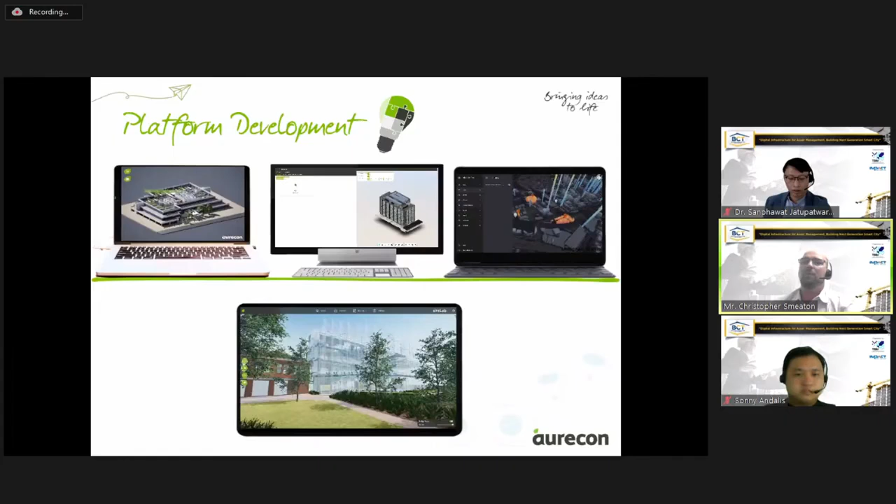So when we look at the experience that Aurecon have in this, we've been doing digital platforms for quite a while. We purchased a company called Unsigned Studio about four years ago, which is a visualization and technology company.

And they have developed online platforms, one of which is called SiteLab. This enables us to bring all of our digital technologies together in one place.

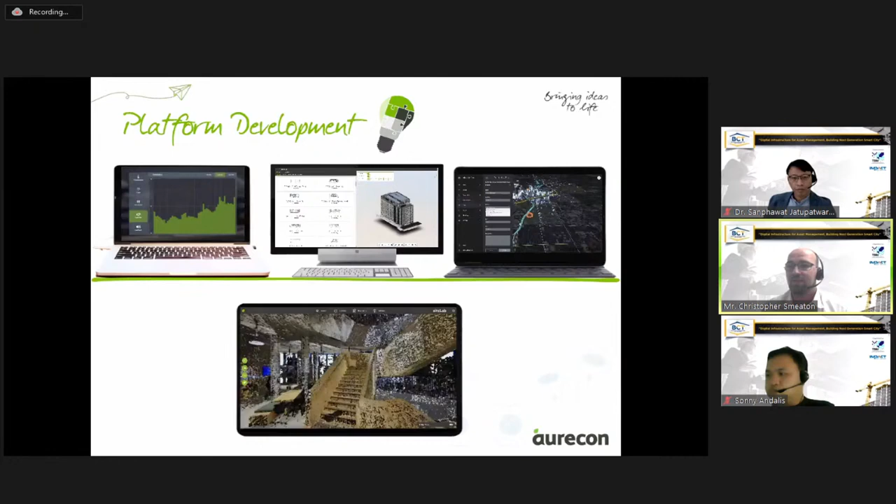We can leverage all of our information from our design information to asset information on site. And I'll explain a little bit about that as we go through this presentation.

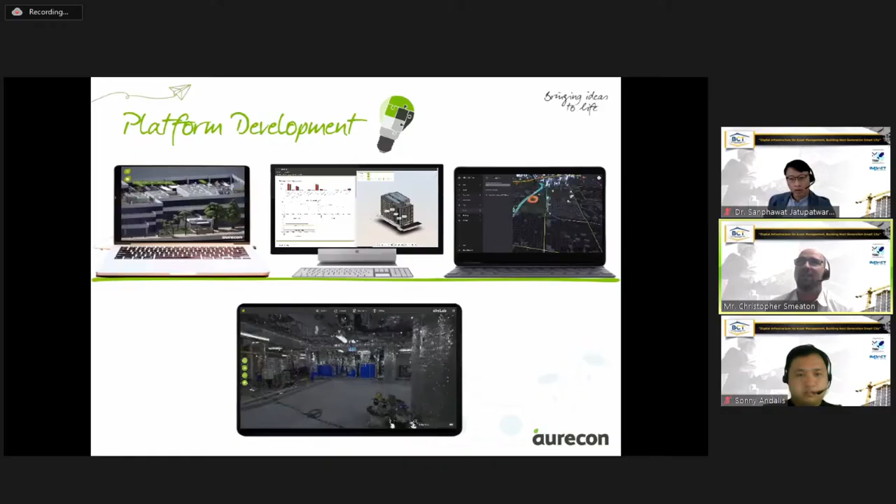So on the far left-hand side, this is one of our own buildings in Australia, one of the first digital twins we tried to do with this platform, where we linked it to different data sets we could get. The next one along, we went into a little bit more detail.

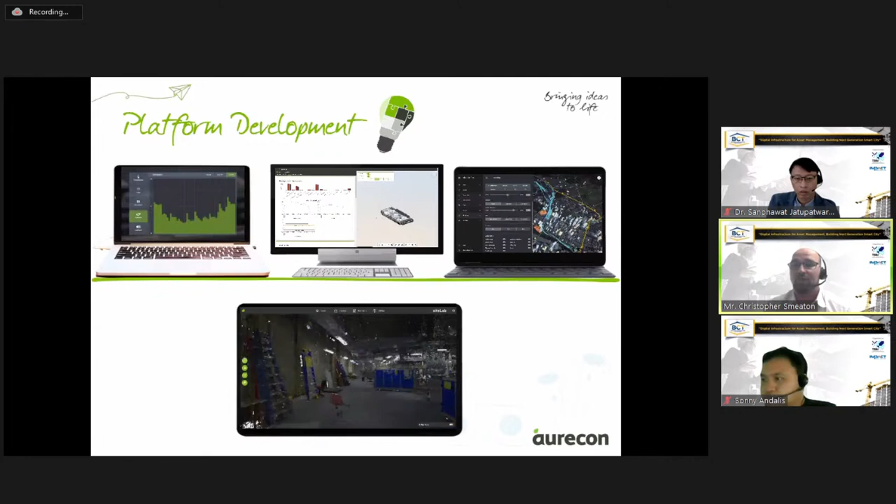This is what we call the Treehouse project, our own building in Brisbane. And we started to link in not only our asset information, but also the energy usage.

We were doing site inspection reports and bringing all that into the one system. So we were able to start running a lot of analytics on that and optimizing our building based on that data.

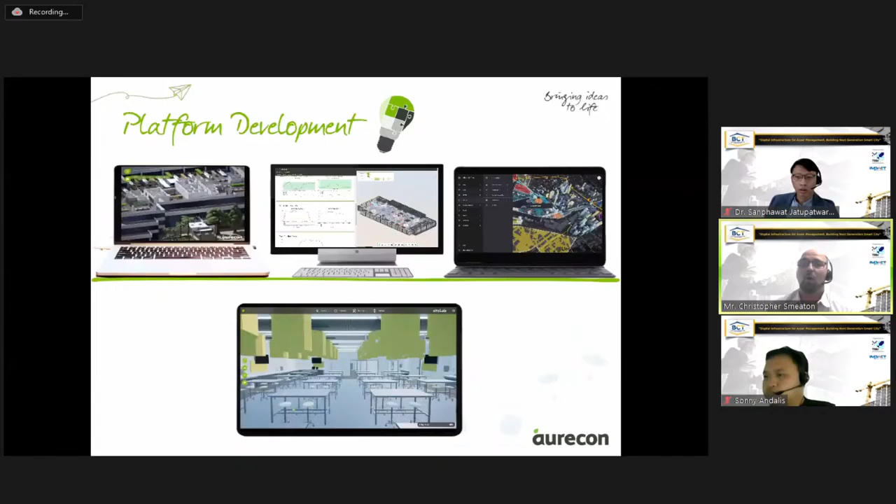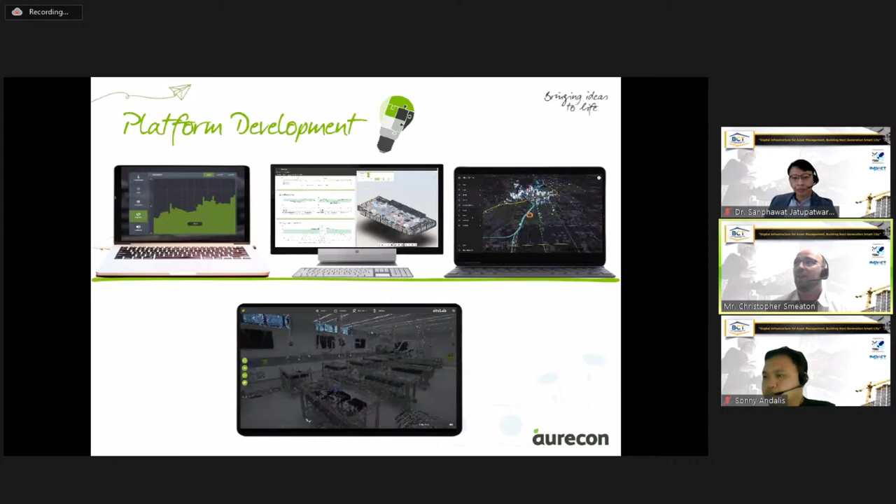And then we have, on the far side, our SiteLab City, which is our city-wide application. I'll talk about that a little bit in the coming slides.

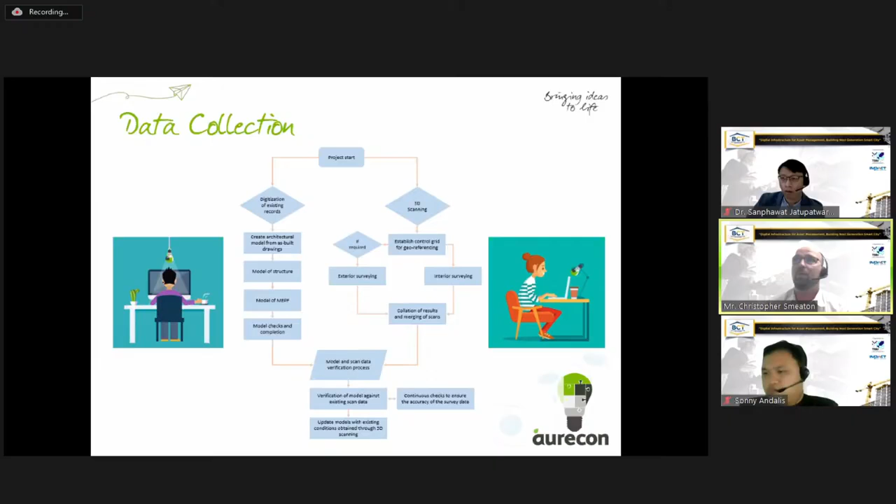So the model became very important to them because they would use the model later to give to other consultants for them to enhance, and then it would be pushed back into this system. Otherwise, if you weren't looking at doing that, you could possibly just use the scan data. But there are pros and cons, depending on what you're trying to achieve for your client at the end of the process. One thing to keep in mind when capturing data for this type of process is the size of the data, and this really helps.

To help with this, it really enforces the fact that you need to start looking at your digital risk assessments and also doing your digital work planning before you move into the project. You scope this under the first stages when we do our workshop with our client, because it's a challenge not just for us as the consultant, but also for your client.

So on this particular project, the raw data alone was 5 terabytes. Once we processed that data, it was over 20 terabytes. And that was just the scan information, let alone all the other information we had to build through the 3D modeling.

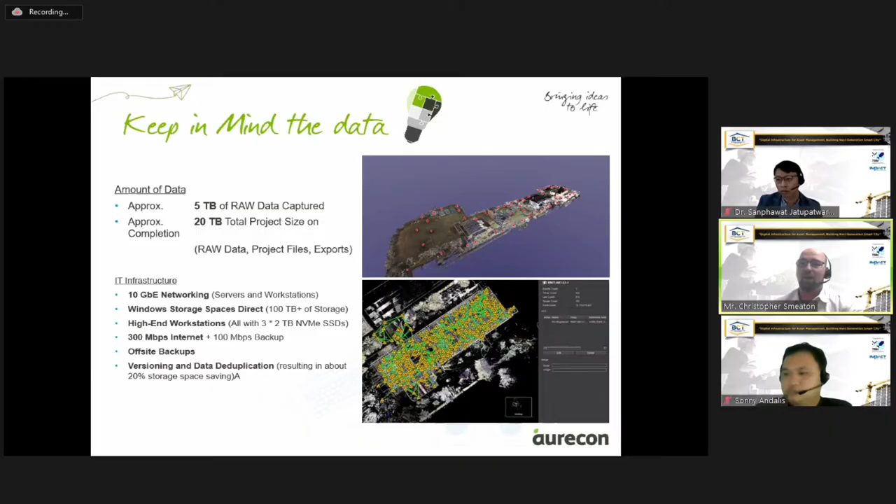Then you've really got to think about how you manage that data in your own IT systems. How are you going to link it into your models? Have you segregated it in the right way? Can you optimize it for modeling? And how are you going to deliver that to your client? Your client might not have the infrastructure to absorb that amount of data. So it's key to think about this before you start the process, and have that open conversation with your client.

Once we started on the project, we established georeferencing around the site, because this was the beginning of a journey, and there may be new buildings or refurb work, so further scanning might happen on site. Plus, we had no way of geolocating the site for the client given the information we had, because that wasn't captured.

So we went to site and created all the referencing and ground points for the client. Later on, if they ever want to do scanning again on that site, they have the reference points they can use, and it can be pulled straight in without having to reference it all again. And this was the equipment that we used.

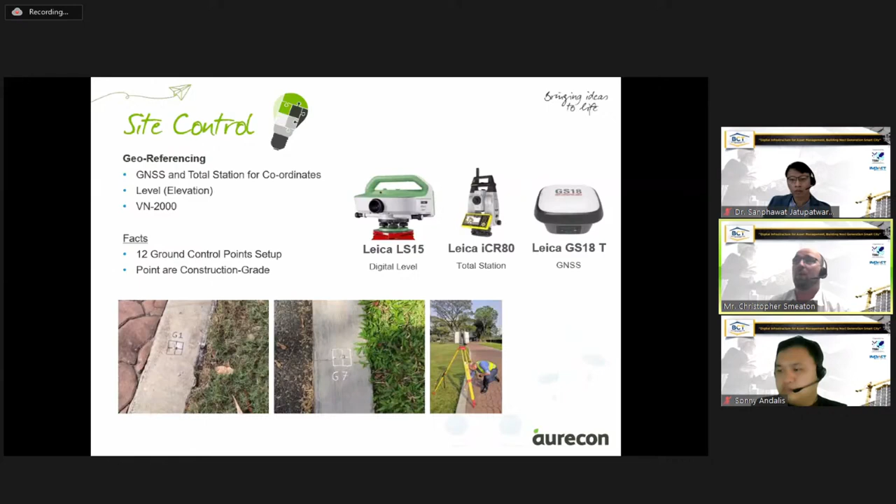So the different technology we used on this project was around the site. We used the Pegasus backpack. All the equipment we used was Leica systems, and a company called GeoInstinct here in Vietnam partnered with us to do the scanning. The Pegasus backpack was used for external scanning.

Extremely good - you just put it on your back and walk around the site, and it does all the capture for you. The quality is really good as well. The only downside is the equipment is about $300,000 worth of backpack, so you have to make sure you don't fall over. But it was a really good capture.

For the internals of the buildings, we used the RTC 360. The quality and accuracy of that scanner was probably far beyond what we actually needed, but it gave our client a lot of information and gave us some really solid information to do the verification with. The other great thing about this scanner is it captured 360-degree photos everywhere we did a scan, which really enhanced our ability to QA/QC these models as we moved forward for verification.

So when we talk about verification on this project, we used various different tools. Obviously, we compared the 2D CAD drawings to the BIM model to do the gap analysis. We tagged all the assets - so GeoInstinct, when they were going around on site with the scanners, whenever they came across an asset tag, they took a picture of it and it geolocated it within the 3D scanner, which then brought it into the point cloud. This really helped with the QA/QC system.

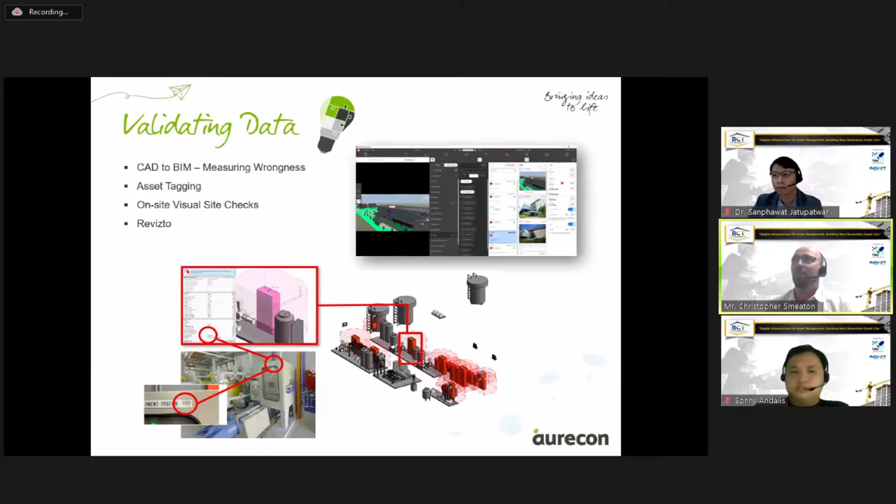We also used Revizto, because it was a really good platform for us to bring our client into and give them that experience of working with our team. We found it really, really successful. We were concerned at the beginning how it would work, but our client was in there taking photos on site and uploading them, giving us real-time feedback when we were doing the modeling. That really helped while we were waiting for the point cloud data to come in, because we could already start the verification from the information our client gave. That really built the trust between us and the client.

Then we had to think about how we were going to use this point cloud data to model. There's a couple of ways we could approach this, and we have approached this in the past. We could create a mesh, and that's probably going to be the easiest way of us dealing with this. We've done this before.

We can upload it to BIM 360 so you can share it with the rest of the team, and we can add these teardrops of information through it, and attach photos and things to that. The system we used color matching when it came to the triangulation, so if there were two triangulated points near each other with the same color, it would delete them, which really reduced the file size.

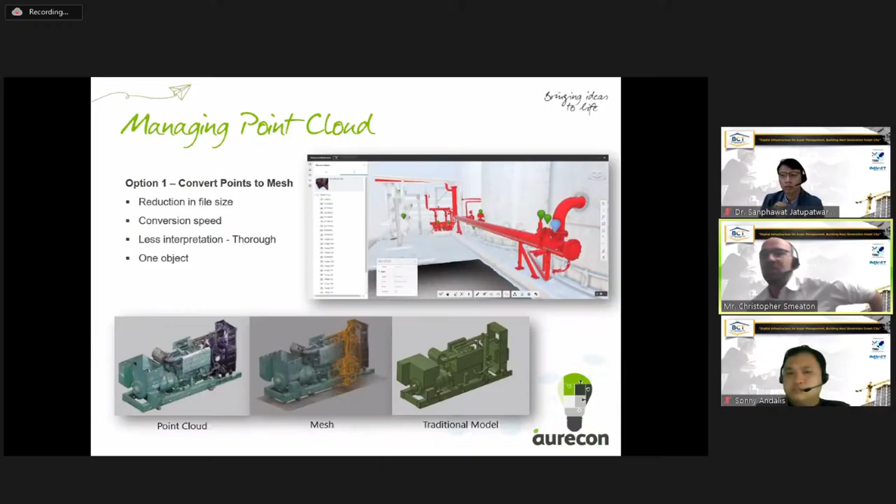The only problem with this is it's just one big object. It's not object-based modeling, which caused us a bit of an issue if we're wanting to use it for automation.

So what we decided to do in the end was to use JetStream Viewer for the client, and you can see that in the bottom of the screen. We also used CloudWorx, which allowed us to link an LGS file directly into Revit. The LGS files are really light. This video was recorded on a tablet that barely runs Revit, but it was able to link in this 1 terabyte file into Revit, and it worked really well.

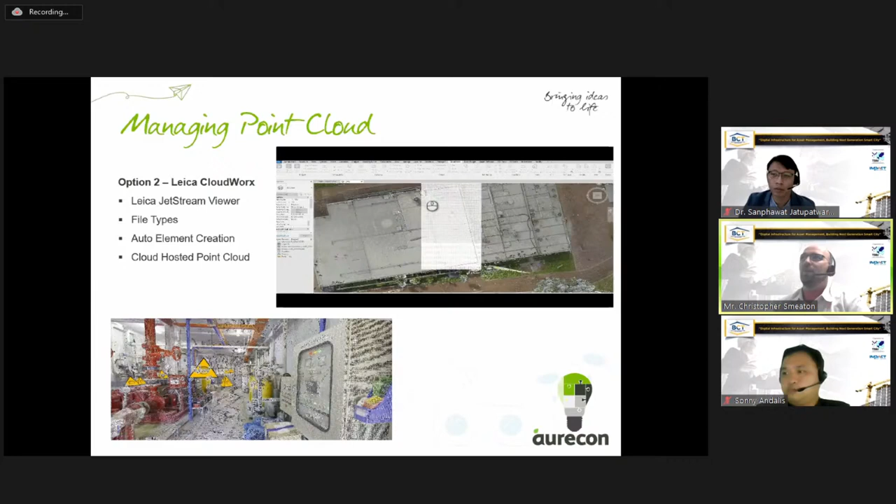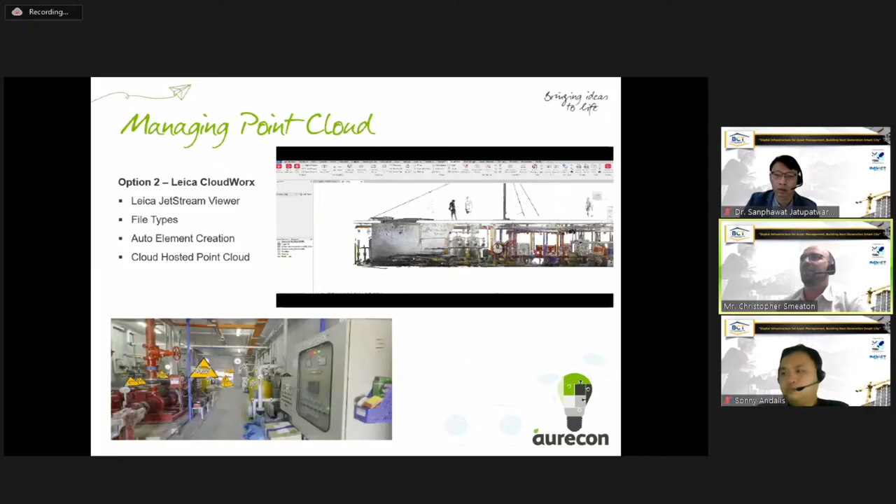What this enables us to use is the inbuilt tools for automation. CloudWorx has piping and wall automation, so we're able to click on piping and it will identify it.

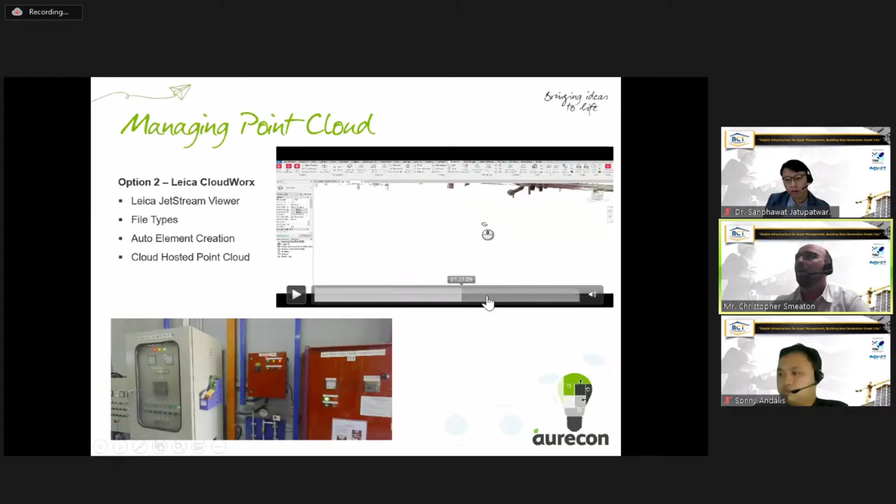I'll just, if I can get my— just fast forward it a little bit for you guys.

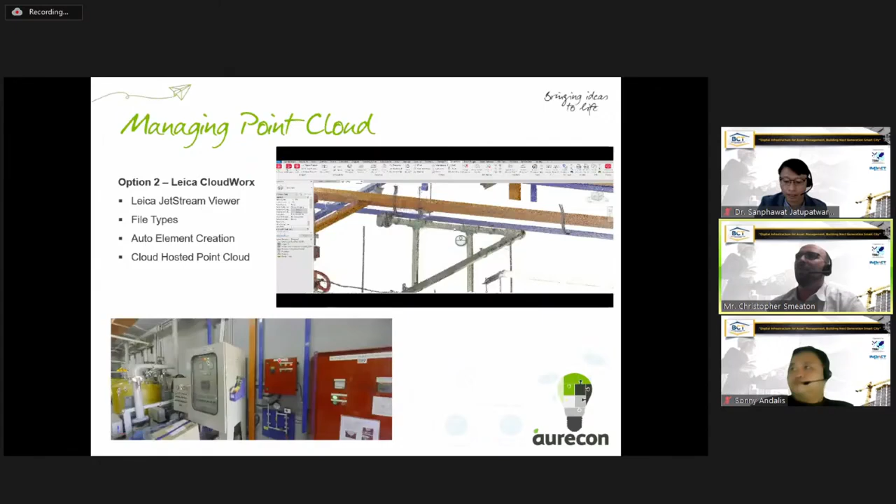So you can choose the different piping and select on that, and CloudWorx will identify the piping from the point cloud just from where you click, and give you a few options. You can just okay it, and then go through and click the pipes. It'll also do the automatic joints as well.

Once you've done that, just wait for it to catch up. You can then use the joint command and pick the two pipes, and it will join the pipes for you and add the connection in there.

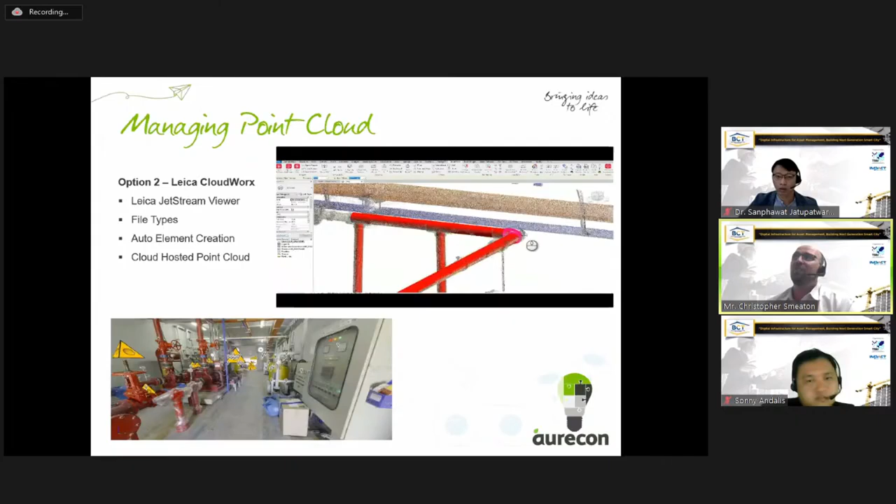This really speeds up the process, and this is why we decided to go for the object-based modeling approach, because it helped us create this from verified information, which was really good.

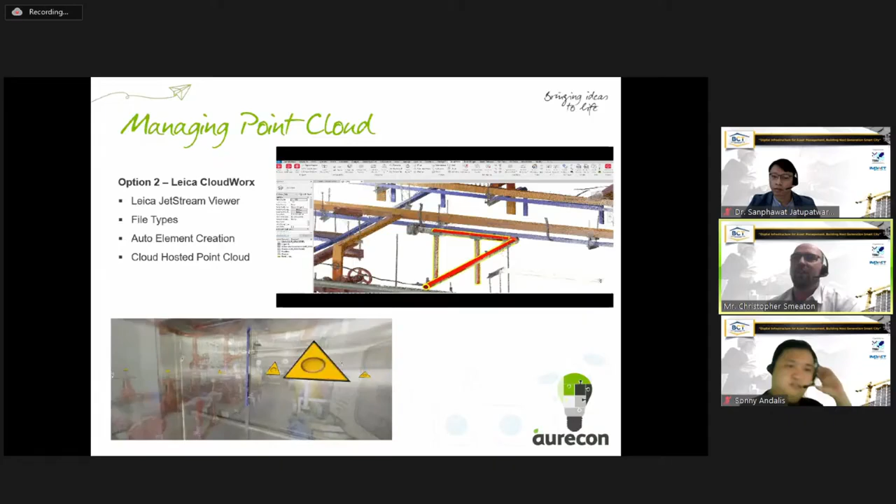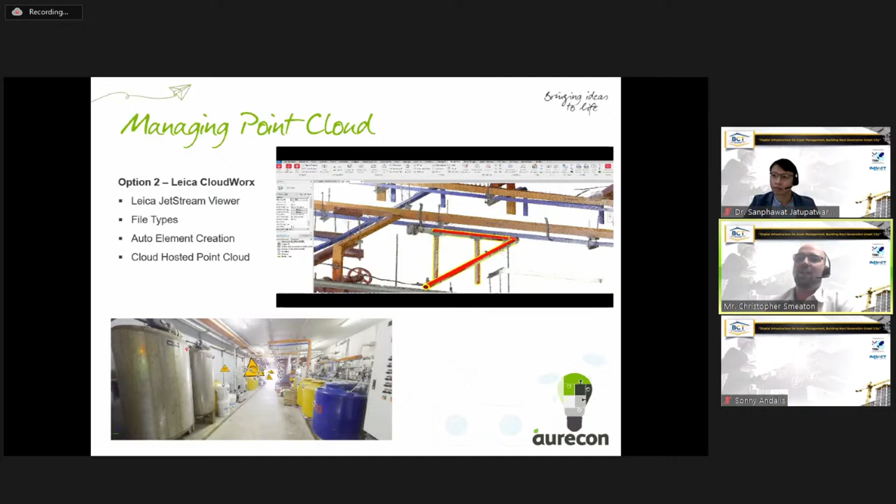The other aspect of doing the 3D scans that helped the client was we were able to give Jetstream Viewer to them, and halfway through this project is when COVID hit. So our clients were able to use this information when they were at home and carry on with their investigations around their assets and looking at the condition while they were off-site, which really helped them.

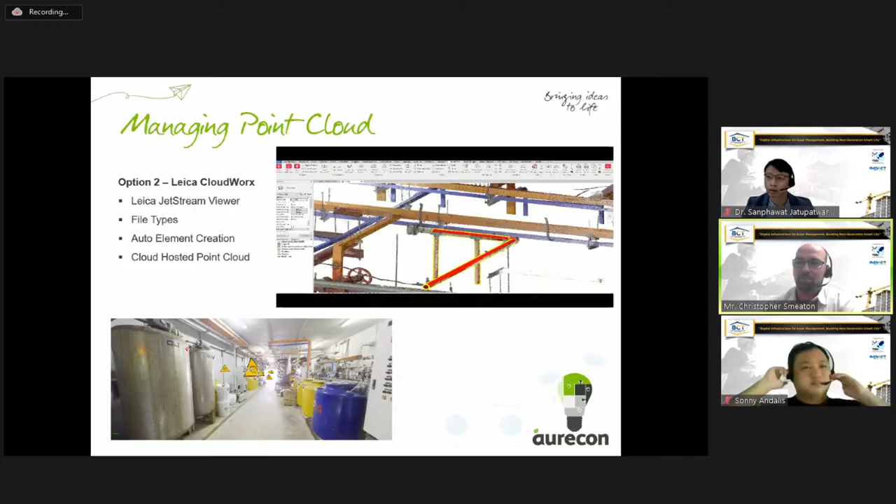The next stage was verification. We use a program called Verity that compares the point cloud and the 3D model together, and gives you a report of where it doesn't fall in line with tolerance. It'll also tell you what's in the model that isn't in the point cloud, and objects that are in the point cloud that aren't in the model.

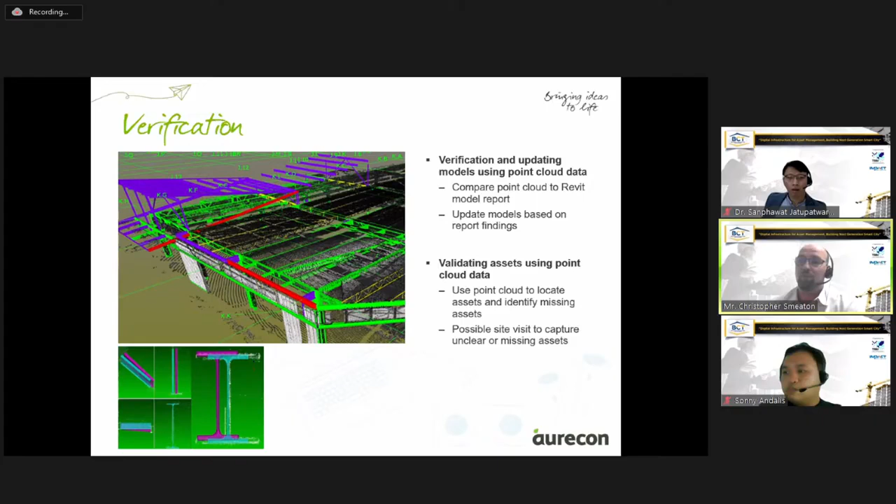We've used this for verification of as-built and also verification during the construction phase, so we can see if the program is following the construction sequence properly, or if there are things missing, which really can help the client.

The next thing was connecting the data. We talked about our SiteLab application, and our client is using Archibus. What we didn't want to create was two systems. We've got BIM 360 that hosts all the models, and we've got Archibus that holds all of the asset information.

We have our SiteLab application that is the interface for our clients to go out on site and use. So what we did is create the API link between Archibus and SiteLab, which helps us push information back and forward between the two systems. It also links the information in from BIM 360, so we created this whole system that is basically your one source of truth for your digital model.

The client is now able to go out on site with their iPad, pick on an asset, fill in an asset form to tell us the condition of that asset, and when it's submitted and approved, it pushes it directly to Archibus. If they're having to do any updates on Archibus, that is also pushed back through to the system. So we're starting to build this really connected system for how they can accurately monitor their assets.

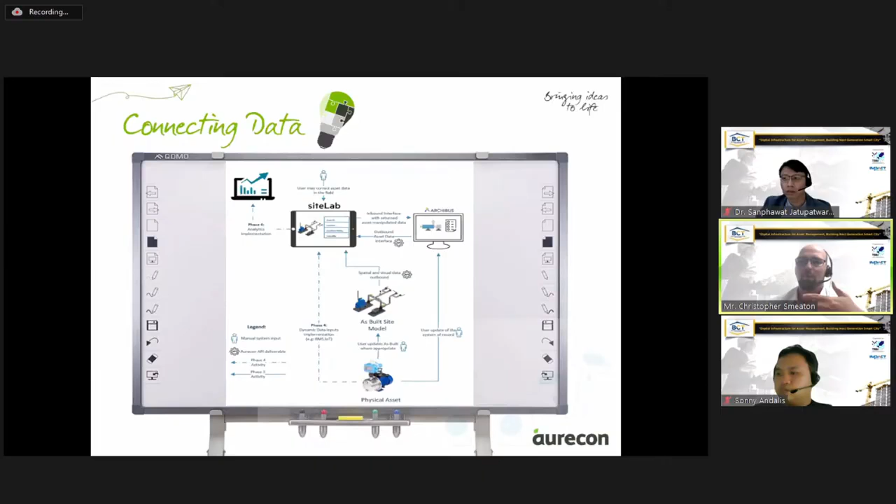So, oh, sorry, just go back.

So this was during the test phase. This isn't the finished article—this was when we were doing our testing for the client. But this gives you the idea of what the information looks like when we bring it into SiteLab.

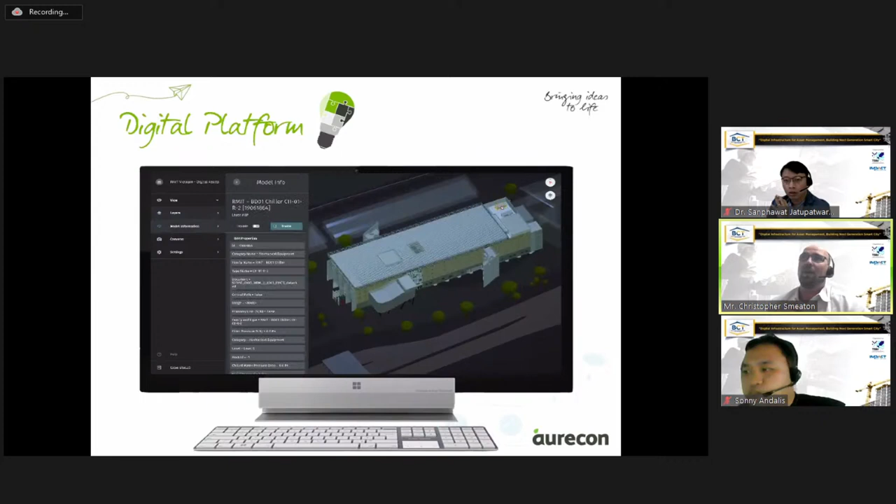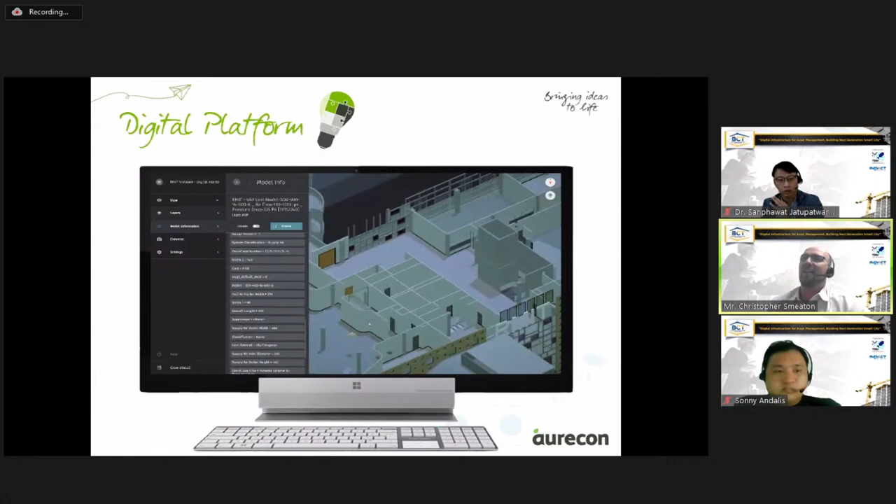This just shows some of the functionalities in this build that we have now—we have a lot more, but you can go in and click on assets and see all of this information. We've tied that information back to Archibus so we can push and pull that information back and forward. We're able to tie in sensors, noise sensors, heat sensors, or any other sensors the client might have, and we're looking at different opportunities of bringing more sensors in to establish a better solution for our client.

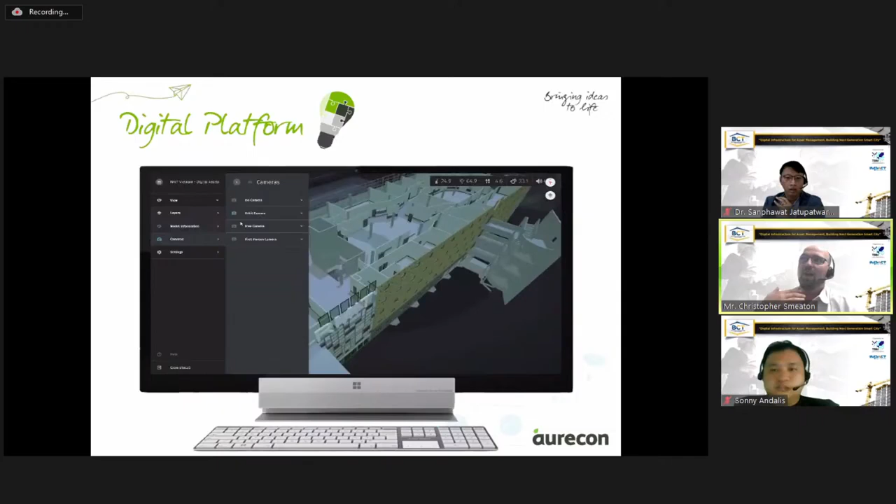So moving on from that, what's next? We do a lot of asset forecasting for some of our clients, and this is when I say a digital twin doesn't have to specifically be a 3D model, because most digital twins actually come through management of assets. Depending on what you're wanting to get out of your asset management is the solution you choose. So in this regard, we were able to take all of the asset renewal forecasting for the client, condition assessments, and everything else, and build it into this type of platform.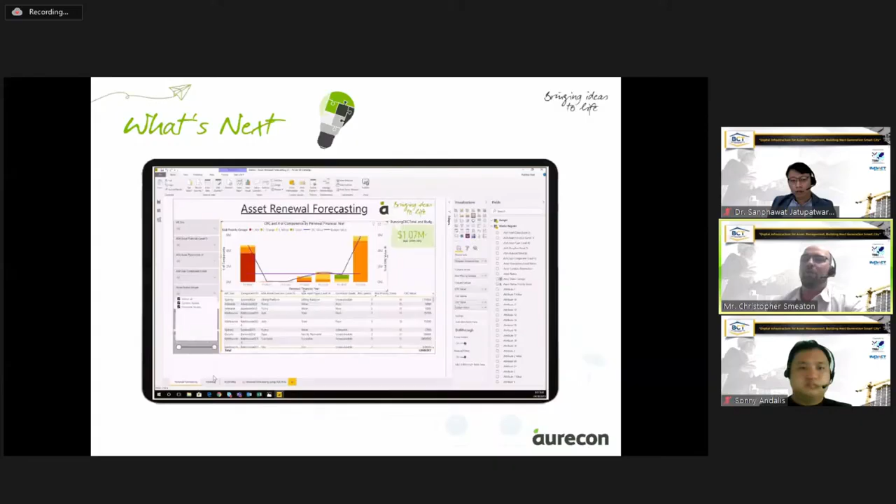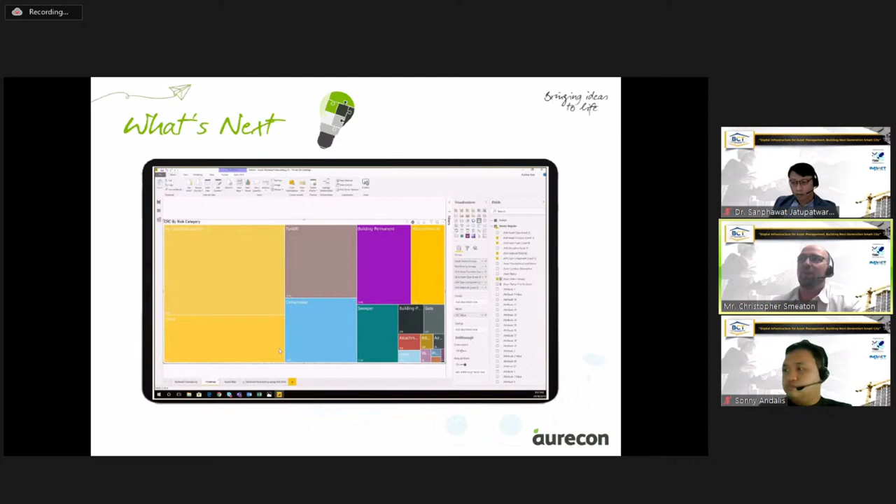So our next stage for what we're doing with the platform we've just shown you is tying in all of this information and connecting our systems. We're able to do the asset renewal forecasting and run analytics based on the assets and the live information we're getting from site. We've already got the two systems—we're just bringing them together now, and we've done it for a few of our clients.

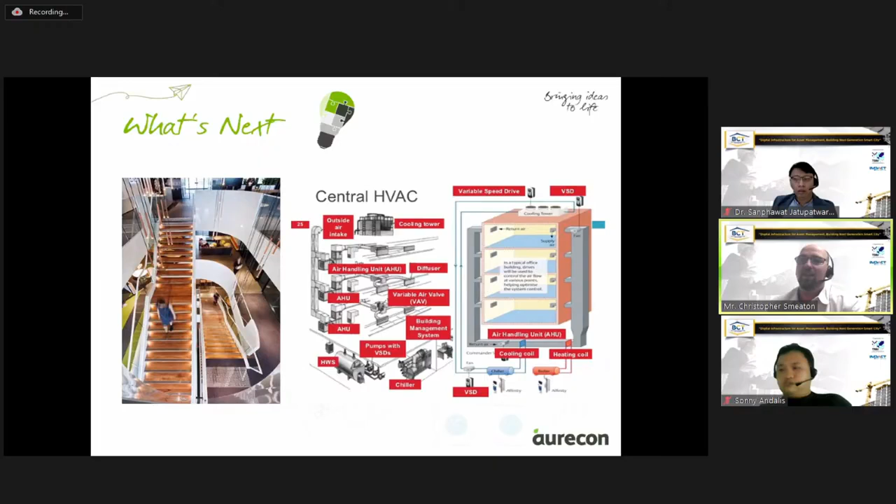The other thing we can do now that we have this information is this: an example where we have our own AI systems that look at the information we're gathering on site through the sensors. This particular solution we focus towards HVAC, so we're able to optimize the HVAC systems for our client using our AI algorithms.

This has been really good—we've managed to bring in quite a lot of savings for our clients on this. We've rolled it out to a lot of the market now, and our findings originally when we first started this out was that a large proportion of the buildings had plant that was incorrectly controlled, which was really quick for us to identify and help our clients manage. We also looked at the trends of the operating hours of when these assets were used, and tried to project how they could be used in a more efficient way. We really brought a lot of benefit that way.

So the next stage is where we look at smart cities and digital twinning bringing real benefit to our industry and to the way we look at data—when we start connecting them. So when we have a city of smart cities, digital twins, and connect them together, we can start to monitor how our cities are running, how efficient they are, and how we can use that information to better design our cities or enhance the infrastructure we have.

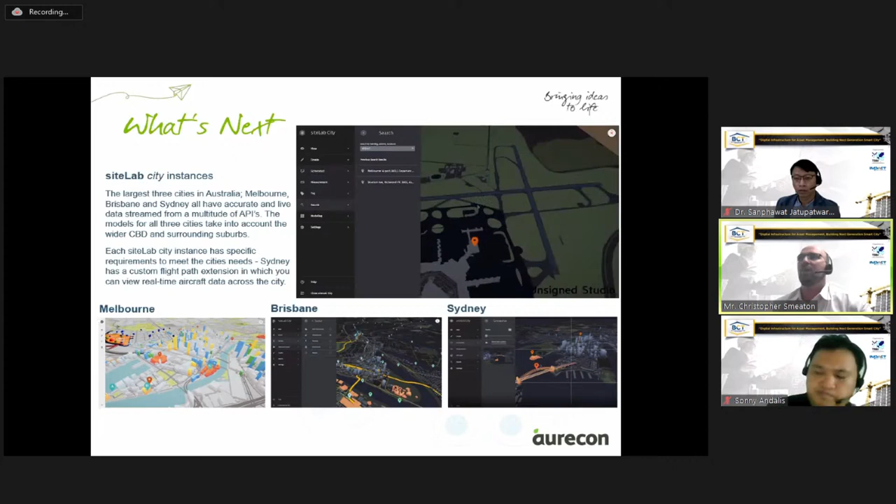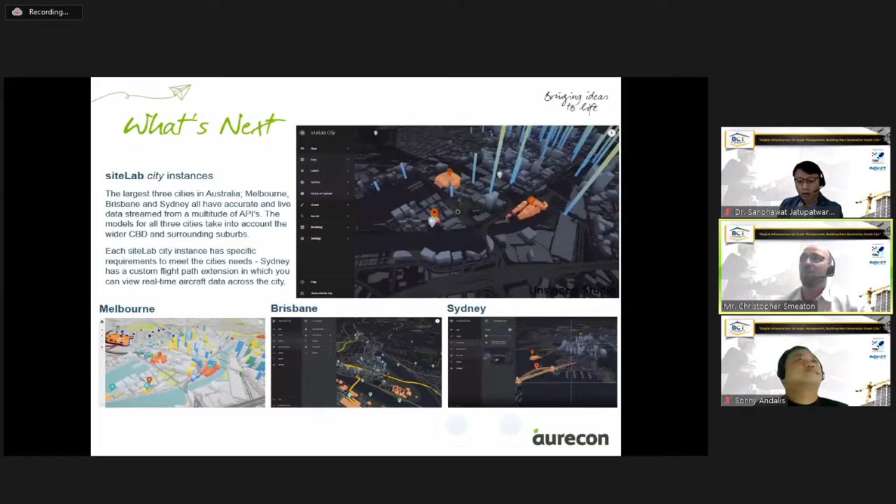Our siteLab City, we've already started to do this with the likes of Melbourne, Brisbane, and Sydney. We've brought this into the system, and we're able to do a lot already—we can bring in flight records, pedestrian movement, traffic controls, any data the city has available, plugging it into this system, including different zones, as well as building permits outstanding, new buildings being developed, and so on. So we're able to really start to look at that.

And that really helps with stakeholder engagement. We can have a look at who is actually opening the system from around the world, what they're looking at, start to really aggregate that data to see what sort of people are maybe looking to invest in the city, what areas interest them, and start to run the analytics and reports from that.

The other thing is we've started to pull in financial modeling, looking at the finances of the city, how it's doing, and doing city monitoring, pedestrian monitoring, and things like that. So we can start to do the analytics about where we might want to enhance mobility in certain areas, how the financial district works, and so on. These platforms are becoming extremely important, and we're starting to leverage this quite extensively now for our clients.

So my last comments with this is, when we start looking at these smart cities and digital twinning for our clients, and how we can leverage all of this data to better suit our needs and our clients' needs, as long as we remember the three main aspects, I think we need to be able to run analytics. So if you can't run analytics from the platform, you're not bringing best practice to your client or best benefit from what we're doing. It needs to be open.

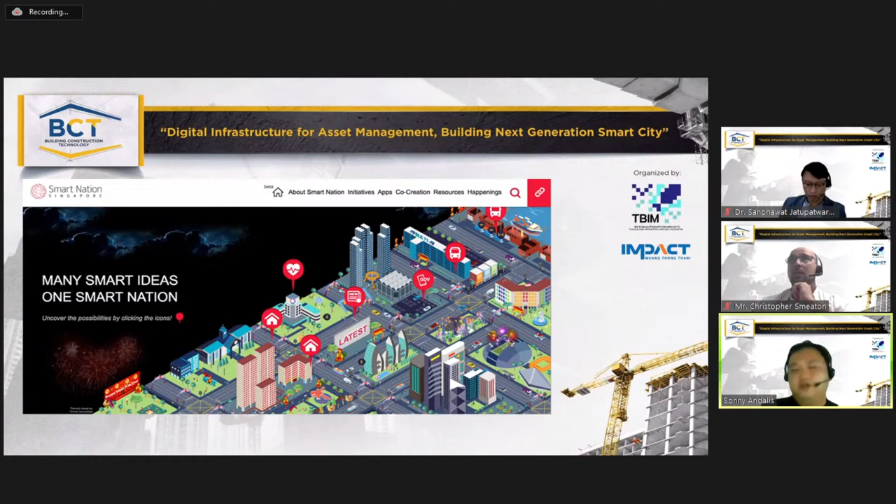The Virtual Singapore project actually came about from the Smart Nation project that was directly connected with the Prime Minister's Office. The tagline for that is many smart ideas, one smart nation. There was a declaration a while back that Singapore will be a smart nation, and the very first thing they would like to do is create a 3D model of the entire country, the entire city. That's the Virtual Singapore project.

The Virtual Singapore project is basically the nation's digital twin, as mentioned by Chris. That's a new word, a digital twin. So that was actually the aim.

As mentioned, this is a project from the NRF, the funder and coordinator. The technical manager is actually GovTech, formerly IDA, and the Singapore Land Authority is the system owner, and the R&D partner is Dassault Systèmes, which is a French company.

So the idea is to virtualize, visualize, and venturize. So we call it V cube. Singapore is not the first one who did this. Cities like Chicago, New York, and the city of London all have 3D models of their cities. Specifically for London, it's the Digital Built Britain. So it's not something unique to Singapore.

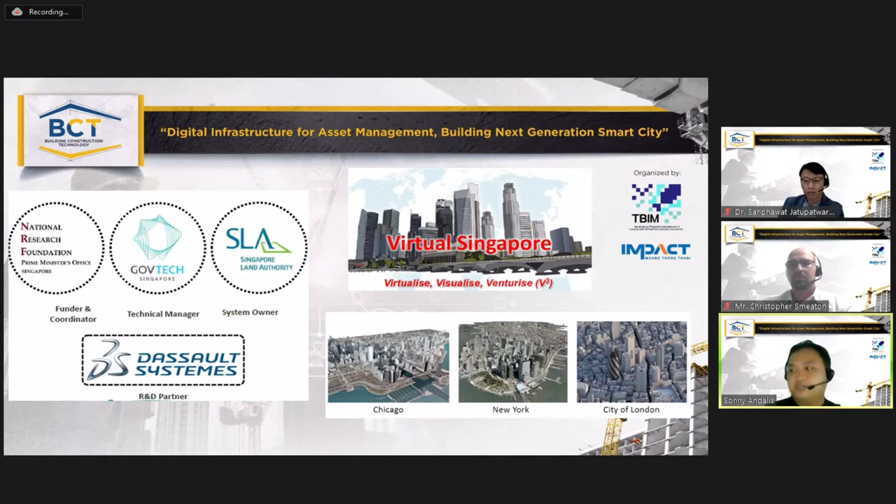A few cities have already done that as well. What I'm trying to say here is that some agencies, like the SLA, Singapore Land Authority, contribute the national topographic mapping in 3D. The building information model is contributed by the Building and Construction Authority for regulatory submissions. And the geospace is contributing the data-rich environment. So different data sets are contributed by different agencies.

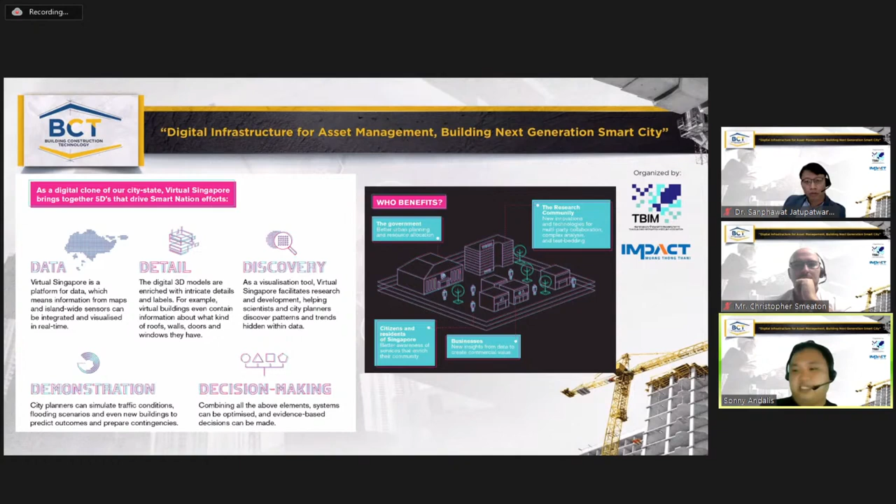So the idea is basically very simple: to have a clone, a digital clone of the city-state of Singapore, where you have the data, you have details or a level of detail, you have discovery. You can actually discover new things. It can be used basically as a model, and they pointed out a few benefits for that.

So this is also another one that a few agencies or news agencies actually picked up: Singapore building Asia's first 3D semantic map of a country. It's quite small, obviously, since Singapore is quite small. It's basically a city.

SLA actually funded it, and in reality the virtual Singapore has 3 layers. There's the master plan 2014, which is the upper layer, basically above ground. The second layer is the underground master plan, that's phase 2. Phase 3 is the geology. So it has 3 distinct layers: above ground, below ground, and soil, or the geology of Singapore. What I'm discussing to you is just phase 1, the above ground.

So this is the timeline of the project. We started June 2015 to June 2017, 2 years for the data capture. 2016 to 2018 was basically testing the virtual Singapore platform. And then 2018 to now is basically managing and operating that particular 3D model.

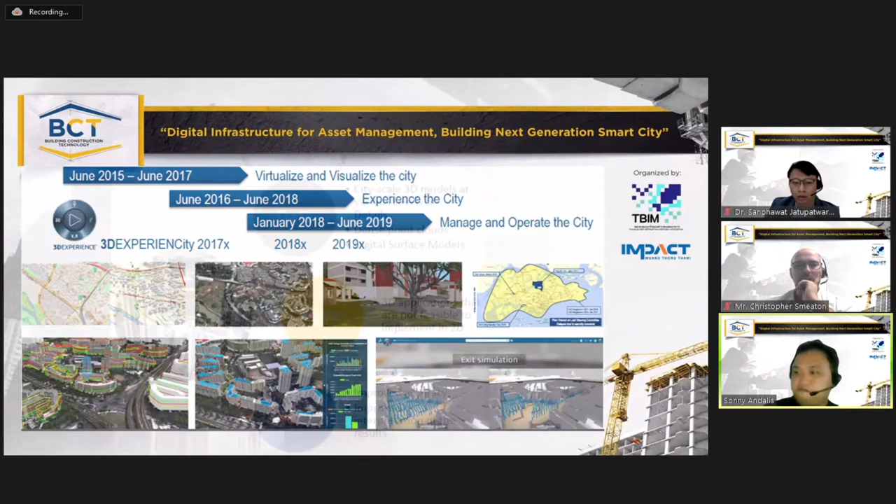So what's the idea all about? Basically it's composed of 3 parts. The first is data capture: city scale 3D models at various levels of detail, predominantly composed of point clouds from laser scanning, and digital surface models or DSMs created from photogrammetry. And there are apps, which I'll discuss later.

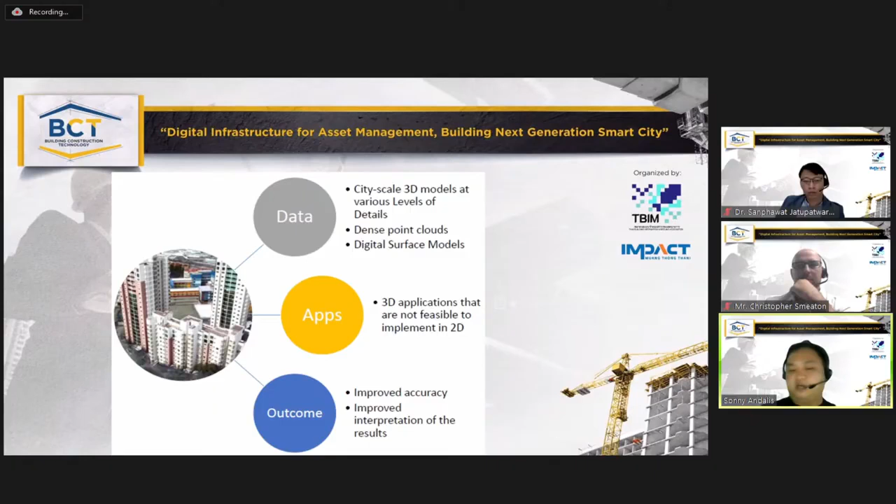There was a lot of discussion on what 3D applications are not feasible to implement in 2D. We have experience in GIS before, but we wanted to implement it on a 3D scale, so a lot of apps were developed. Then the outcome: what's the accuracy, the interpretation of the results, since we did a few simulations with that particular 3D model. This came from a collaboration with Delft University from the Netherlands.

The applications we're looking at include visibility analysis, energy demand estimation, emergency response. It can be used for shadow estimation, utility management completely underground, solar potential since Singapore is a tropical country, 3D cadastre, and so on. So there's a lot of proposed use cases for the 3D model.

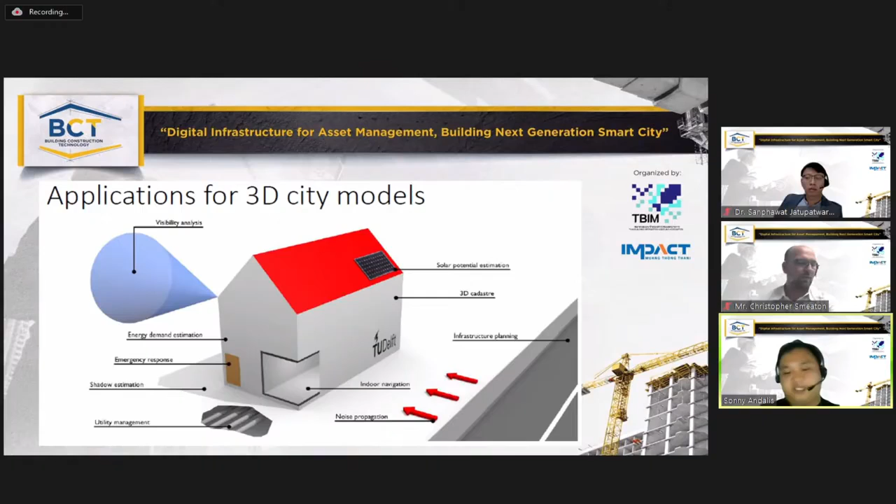But predominantly, at the time this was started, the purpose was haze propagation. As you know, in Singapore around August, September, October there's a lot of burning from Indonesia, so we wanted to simulate haze propagation. That was the original use case.

Solar orientation, because we wanted to put up solar panels on roofs to maximize given Singapore's position at the equator. And then shading and cooling, because they promote sustainability. Being at the equator, a tropical country, there's a lot of air conditioning usage, so they wanted to seriously consider sustainability, to simulate shading, cooling, and natural ventilation.

So let's talk about data capture. The Singapore Land Authority created two distinct data sets: the oblique and the nadir, that's the inclined and the vertical imagery, and high density LiDAR.

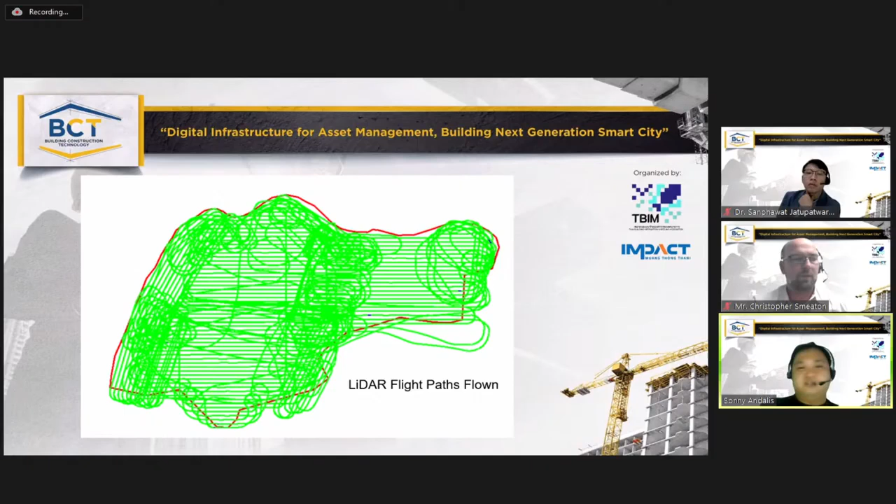Similar to what Chris presented, we used laser scanners to create point clouds. This is the LiDAR flight paths. We mounted a LiDAR scanner onto an airplane, flew it around Singapore, and created this. That's the images that were captured.

Similar to what Chris mentioned, right, the backpack, the infamous backpack, that was used to supplement the imagery. Basically this is terrestrial imaging. The laser scanner was mounted onto a car, and to supplement it, this was done by another Chris from AAM, an Australian company. I don't know if Chris actually knows that.

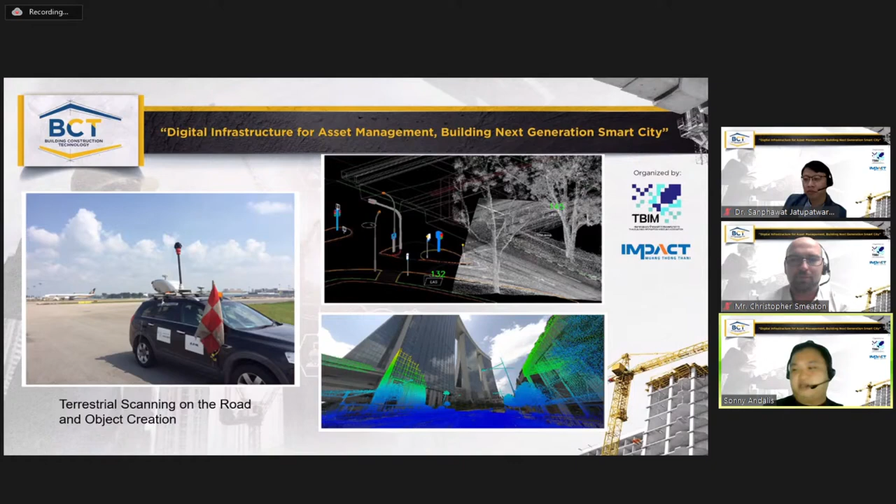Yes, so terrestrial scanning on the road, that's what's happening. It's basically similar to Google Maps, but Google Maps uses photogrammetry. We have both photogrammetry and terrestrial scanning using laser scanners. So that's the output that we have.

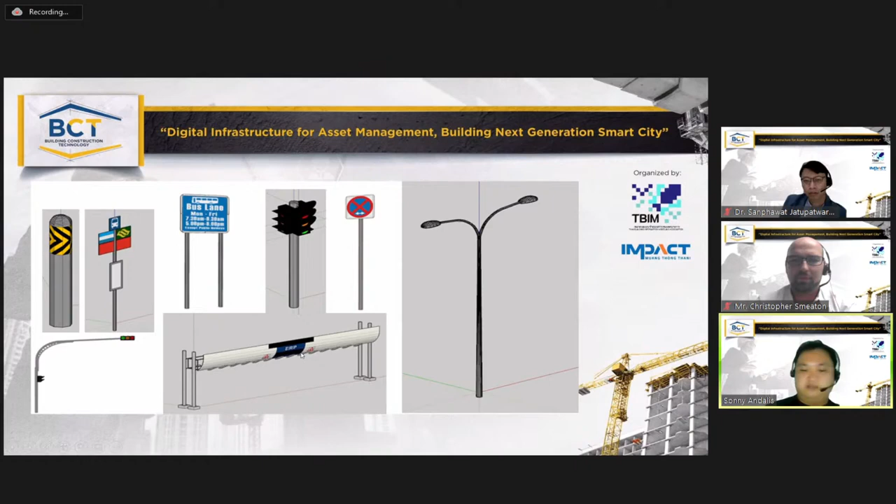And then we started creating what we call city objects: bollards, bus stops, stations, traffic lights, and so on. We created those cityscape objects. This is ERP, basically toll gates in Singapore. And then we created this imagery, this 3D model. So we started building the 3D model of Singapore from scratch.

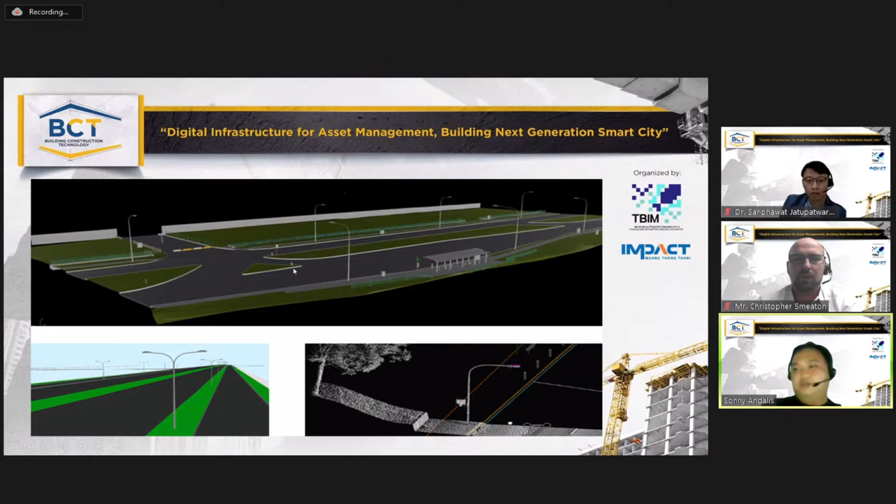So you can see here bus stops and so on and so forth, including trees. It's actually painstaking work because this was not automated at the time. There's an army of modelers behind this, creating the 3D model of the city. It was not automated, it's very painful, but this was actually created.

So in summary, there's a lot of panoramic images that were actually captured, that's 487,000.

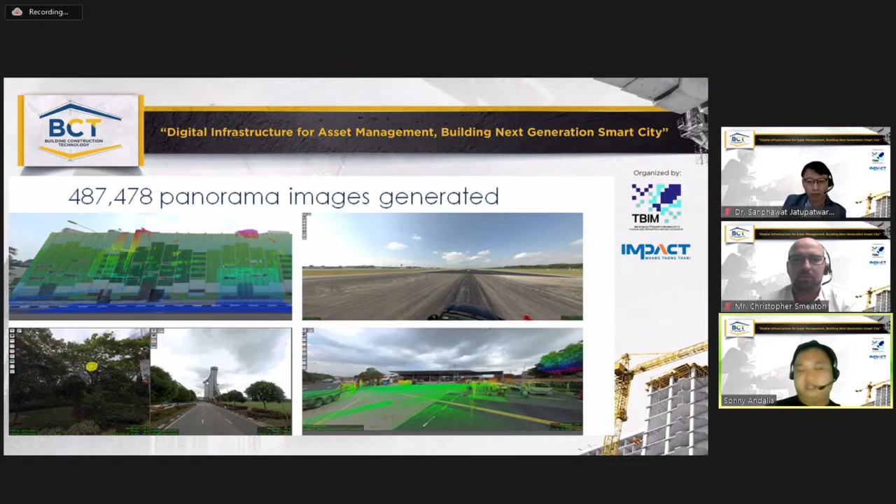579 million LiDAR points was actually captured at the time. We drove roughly 50,000 kilometers, in addition to the photogrammetry coming from the plane - there's actually terrestrial scanning from the car. 50,000 kilometers was driven by 3 drivers, 2 surveyors, 12 hours a day with 2 cars. That's 14 plus terabytes of processed data, and roughly 45 terabytes of raw data that was collected.

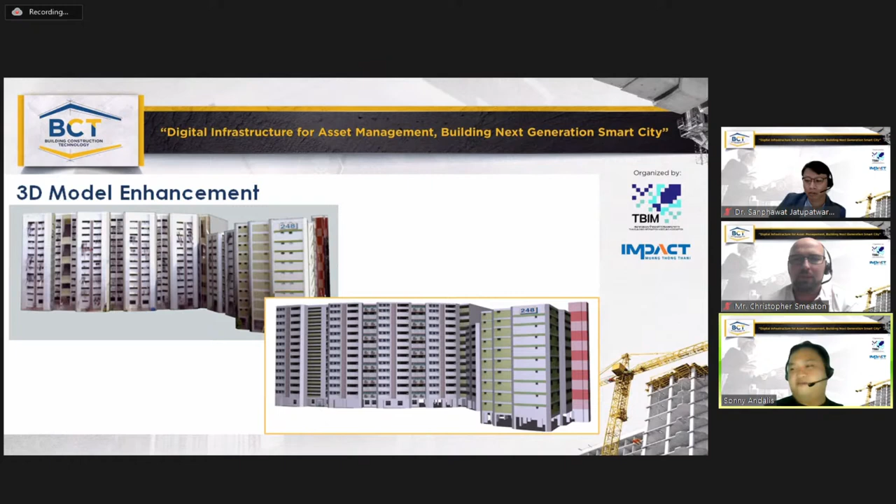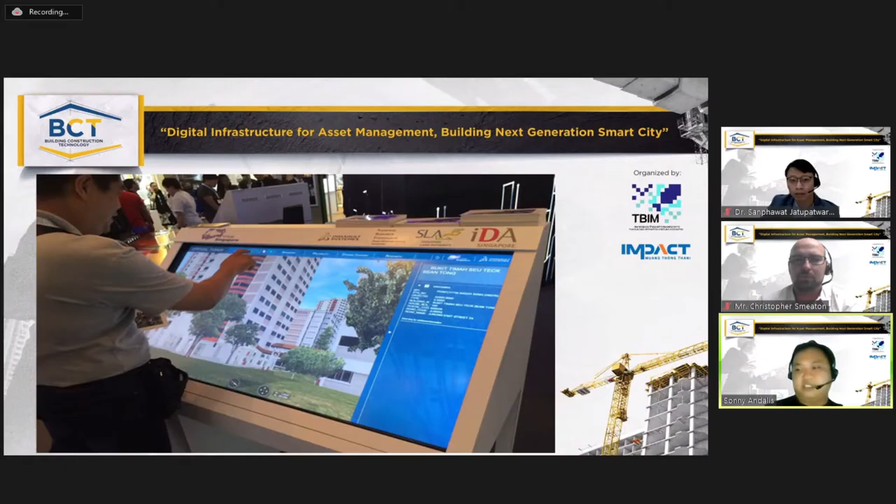Model enhancement, obviously, is actually to basically polish the laser scan and photogrammetry coming from the HDB blocks - that's the public housing in Singapore. And this is the actual final product at the time, 2016, 2017, that was featured in an exposition, an exhibit.

One of the reasons why we went through that is because there was a problem we have. So this is obviously GIS - you cannot distinguish between the airspace lot and the subterranean lots. That's the reason why we delved into this, so that was phase 1, the above ground. But there's a more serious problem, which is underground. So, as I mentioned before, Virtual Singapore has 3 layers: above ground, below ground, and then geology, 3D geology.

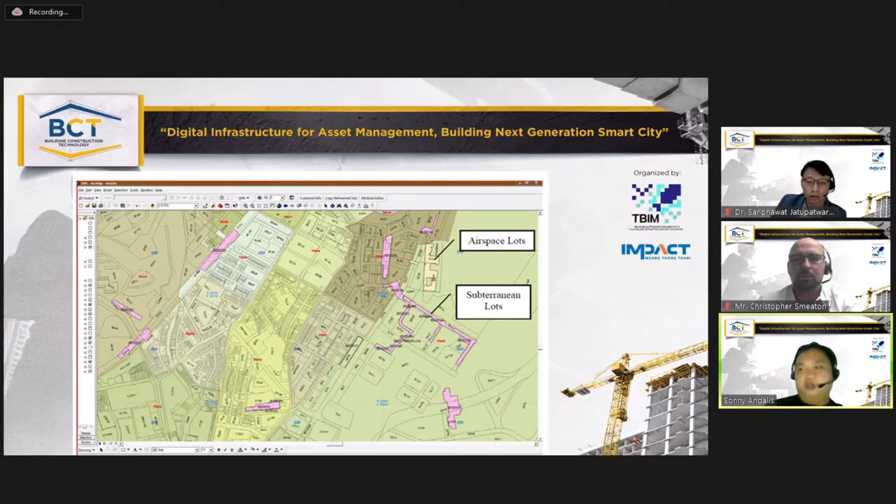So this is the second one, phase 2 of the project. I mentioned about Geospace - Geospace is basically the government GIS system. It has 924 data layers. It's only accessible to public agencies. This is basically the government-wide GIS platform.

It's a private one. There's a public-facing one called OneMap that is available to the public, and it includes 104 data layers that can be accessed by business, academia, citizens, and NGOs.

So what we have done is basically ask the different agencies what they need the model for. For example, the URA, the Urban Redevelopment Authority, is asking for digital terrain models and 3D buildings, and they would like to use that for urban planning, specifically for underground works. These are the things that different agencies asked for, what they would like it to do. For example, with parks, we laser scanned terrain and trees because they would like to conduct biological studies and so on. So we asked every single agency what they intend to use it for.

Denmark and Switzerland already have national 3D maps, so it's not something unique. Hong Kong has also conducted 3D mapping of their central business district. So we just follow the applications from other countries.

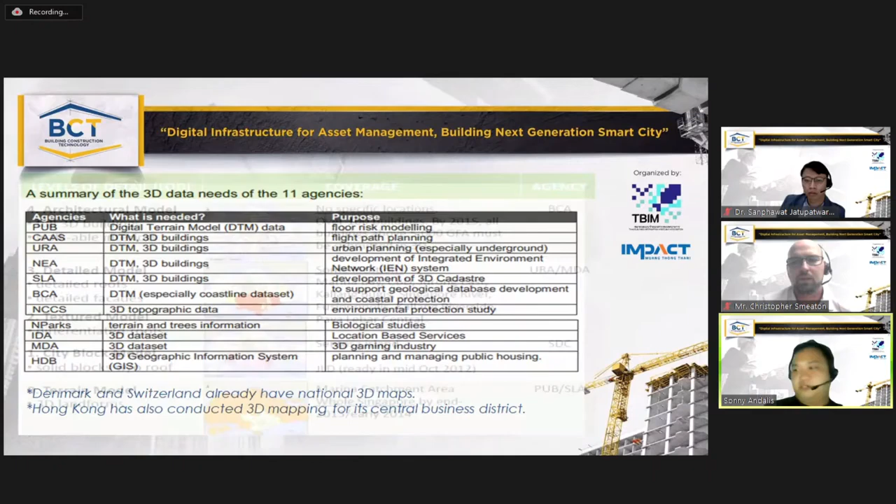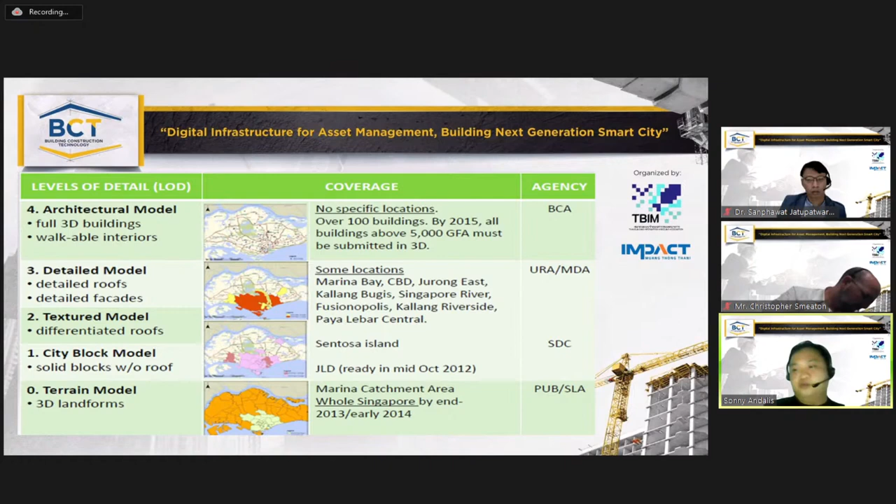So this is the level of detail. What we said to them is, okay, if you have a particular need - this particular agency will have architectural models, for example. This particular agency will have detailed models that include the roof and the facade because they're using it for urban planning. Textured models will be used for other locations, and so on, up to this particular level of detail, following the CityGML level of detail, from 0, 1, 2, 3, and 4.

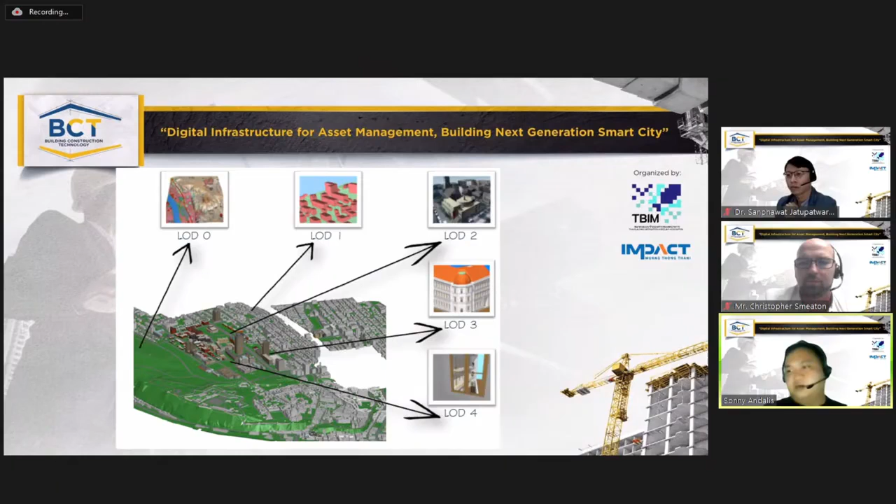So this is what I meant. LOD0, as you saw from the previous slide, just talks about terrain. LOD1 is basically the shape of the buildings. LOD2 is textured, LOD3 is basically the BIM models, and LOD3 and 4 are actually the BIM models, the 3D models coming from Revit, ArchiCAD, Tekla Structures, and so on. So there's a level of detail assigned to the agencies, and these are all incorporated inside Virtual Singapore.

Then there was a question about format - what format are we going to use for this very big data set? There were two competing formats that we evaluated: CityGML and Land XML. There's a big difference between the two, obviously, but we liked the fact that CityGML is neutral, it's an open format, and it's supported by OGC, the Open Geospatial Consortium.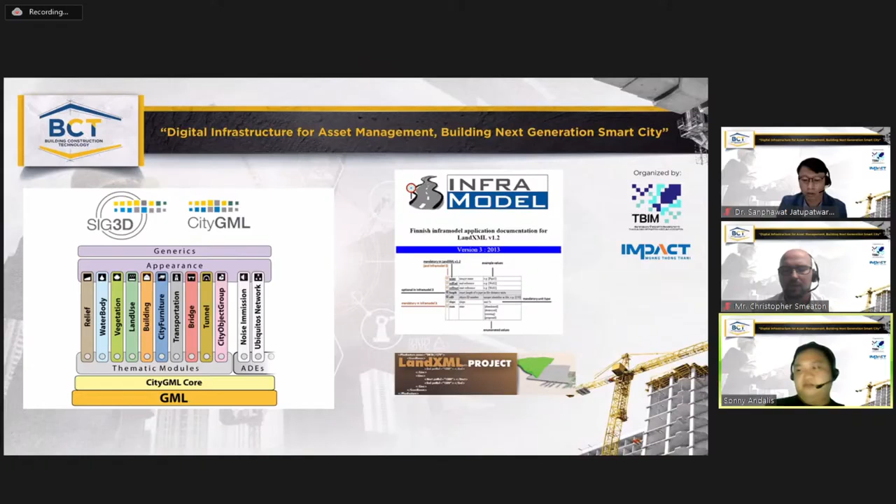We did a feasibility study, a comparison study between the two, and then Ordnance Survey from the UK supported us and pushed for it, and it was decided to use CityGML. So let's talk about CityGML - what exactly do you need to model?

So these are two different distinct examples. The one on the left, if you see here, this is obviously above ground. These are the things that need to be modeled or extracted from a 3D model, from Revit, for example, or Open Buildings, or ArchiCAD.

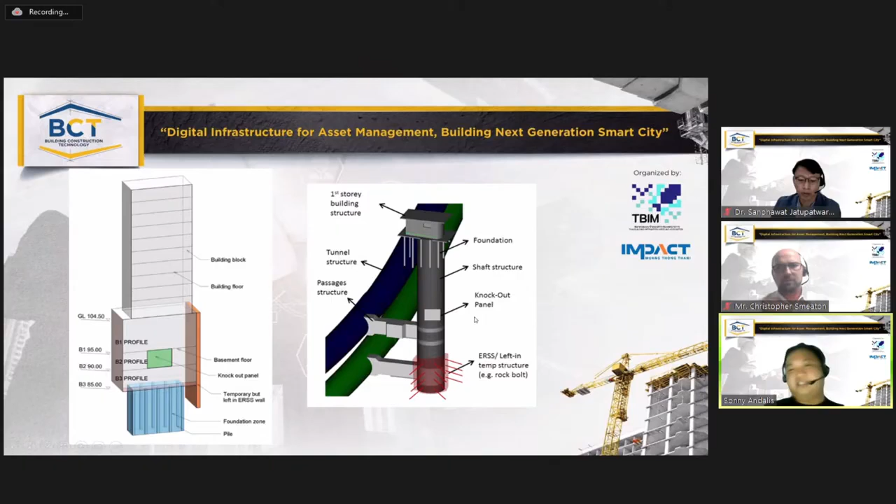The one on the right is actually an example of the specifications that was required for underground structures. As mentioned, there are 3 layers of Virtual Singapore covering the above ground on the left and then the below ground structures. These are the things that need to be captured, including MRT lines, tunnels, underground pedestrian walkways, foundations, what type of ERSS was used, what type of rock bolt was used, or if there's a knockout panel, and so on. So it's actually very detailed.

So let's talk about the uses. It's already fully operational. This is a typical use. This was actually featured in one of the Chinese newspapers.

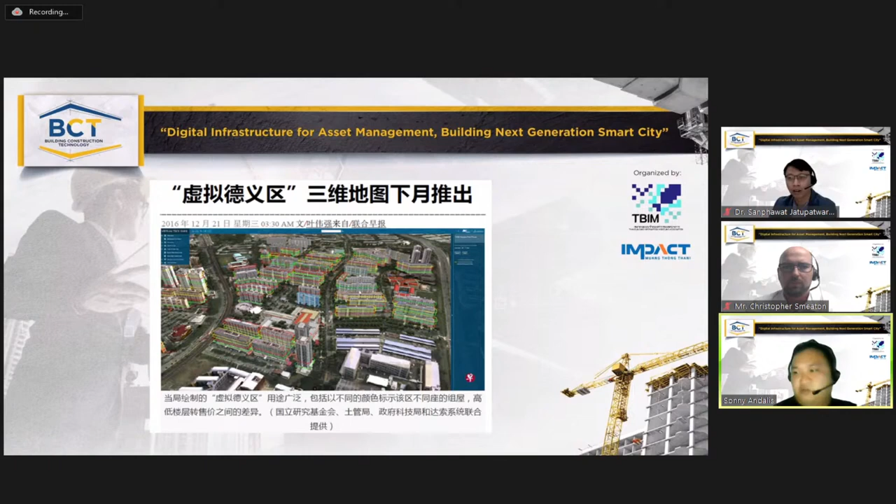One of the typical uses that Virtual Singapore was used for is aggregating the data. The platform, if you see here, is actually 3D Experience City from Dassault, and it can color code the annual electricity consumption of every building.

For example, this particular red building here consumes X amount of energy, so they will be asking why you are consuming too much. That might be a mall or an office building, and the rest of the buildings are basically residential only. So they can color code it to show the electricity consumption of a building, from a building all the way down to an apartment level or an office level.

Another example is obviously CFD, or computational fluid dynamics. This is actually Bishan, another district, where they do CFD simulations.

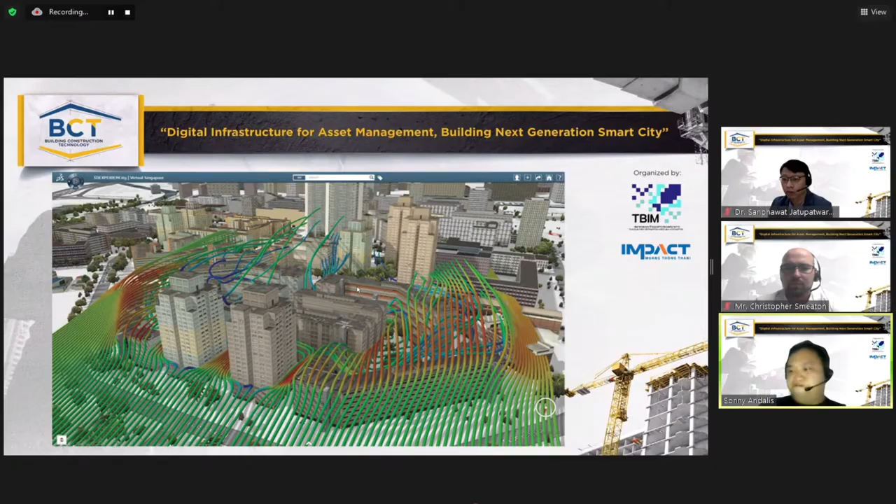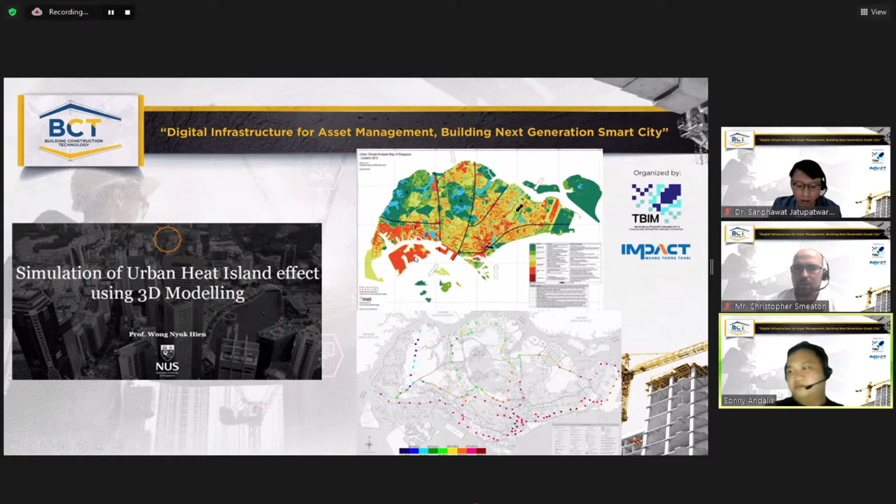This particular portion has so much heat because these are mostly the petrochemical or oil storage portions of Singapore. So you can visualize in 3D, not just in 2D, where the heat is coming from, and then specifically distinguish between the rural area and the city area.

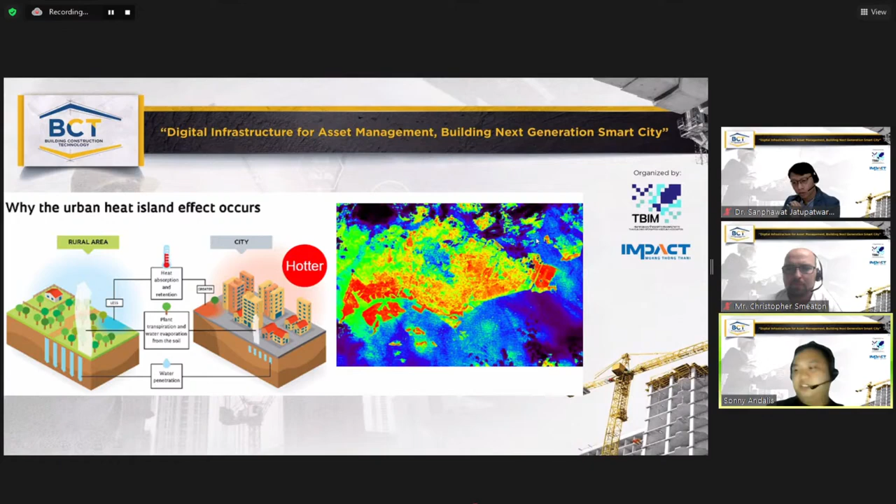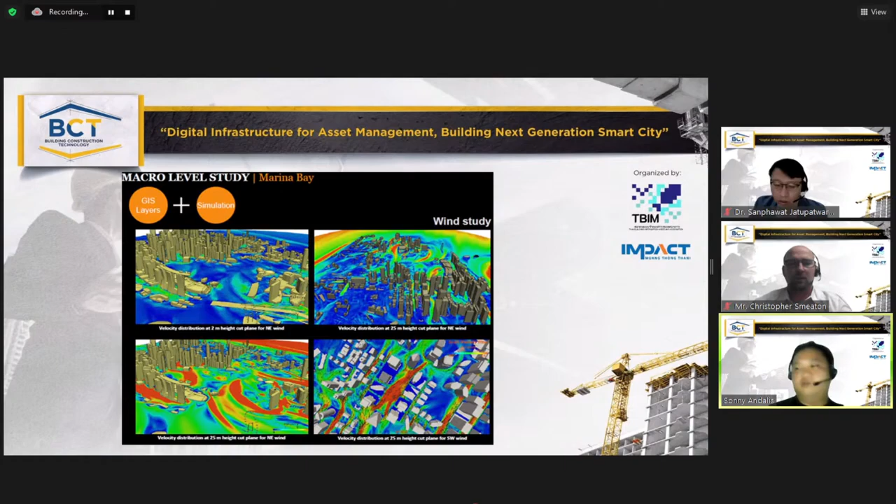That's a typical example. Another one is macro level study of a particular district - this is wind, for example, the wind flow at the Marina Bay area. You can have GIS layers plus the simulation coming from Virtual Singapore, and you can identify areas that can be naturally ventilated, or areas that are producing too much heat from the air conditioning. It explains why that particular area is actually too hot.

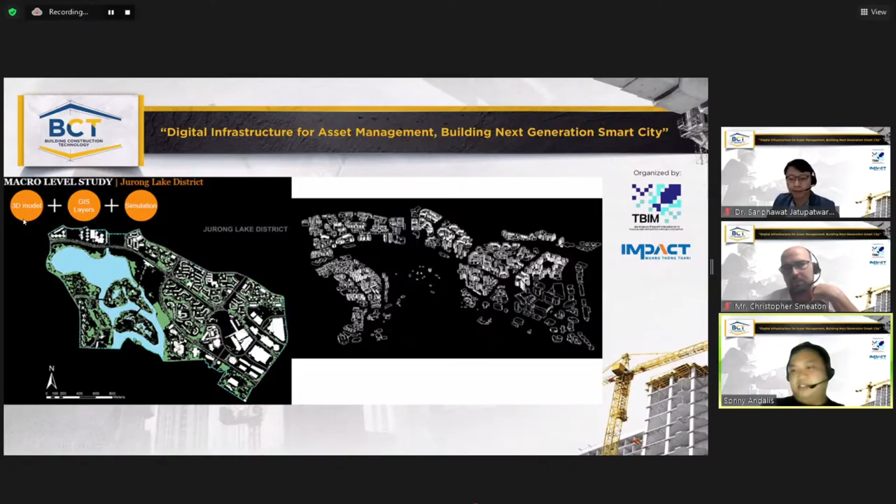It can be on a district level. This is a typical example of a Jurong Lake District study using a 3D model, GIS layers, and simulation.

Another interesting part we obviously considered is the underground. This is basically subsurface underground condition detection using GPR, ground penetrating radar. As you are aware, ground penetrating radar, depending on the frequency, can reach between 5 to 10 meters, but this particular GPR is able to detect up to between 20 to 30 meters, depending on the soil condition. If it encounters rock, it's more beneficial, but if it encounters soil, it's quite shallow.

So this is actually phase 2 of the mapping. What I'm trying to say is that phase 1 is pretty easy, you can walk around, take a picture, or shine a laser to it - that's basically above ground. The main challenge of Virtual Singapore is actually collecting underground structures or soil conditions, like pipelines and so on, or foundations. So that's actually the main bulk of the research, the underground.

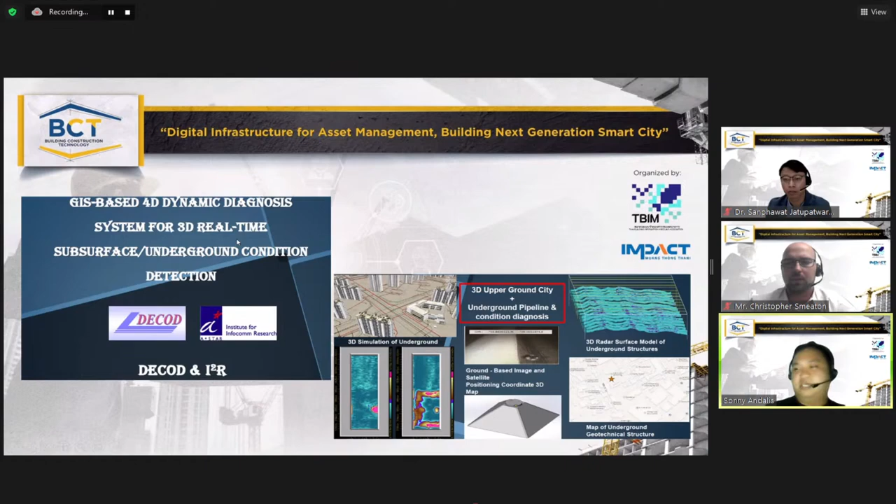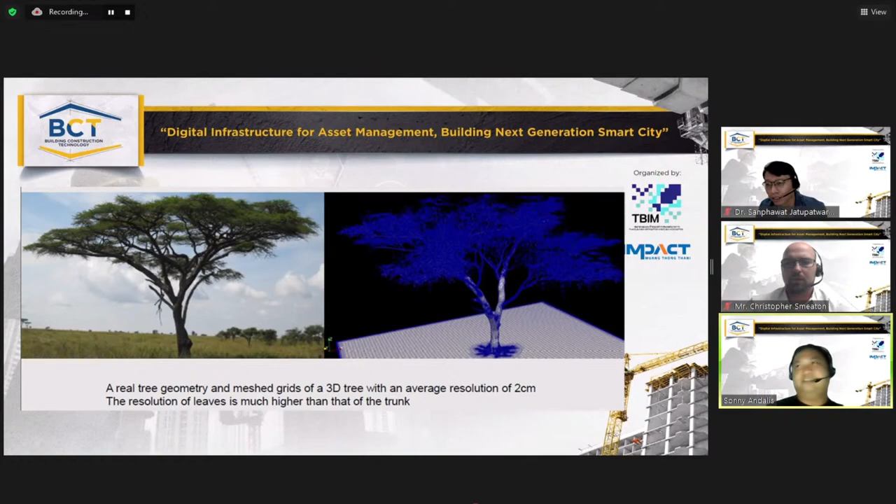I mentioned about the NEA, the National Environment Agency. They actually laser scanned all the trees in Singapore and tagged them one by one. As you're aware, trees grow, so year 1 can be this foliage, year 2 can be this foliage. They're tagged one by one with 3D geometry, and they have the leaf area index automatically computed, so they can compute how much sun shading or shadow is generated by that particular tree. There's a color tag, and they've tagged roughly 60,000 types of trees in Singapore.

Another one is sound, so sound metrics. This is basically the visualization done for sound noise in the city at some of the locations. That's one project, done by NTU if I remember correctly.

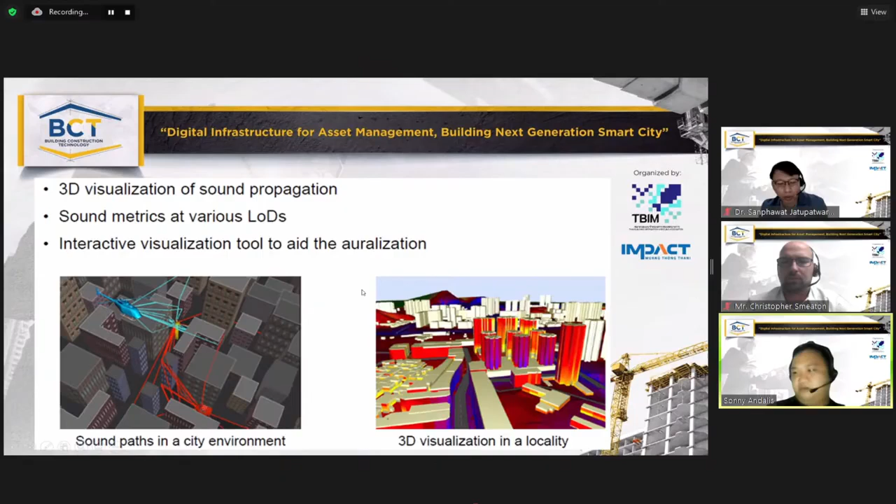Another project is also coming from NTU, which is Virtual Singapore for Urban Mobility. This is actually for autonomous driving. In Singapore, there will be an introduction of an autonomous bus in about 2 years, I think 2022. We need a hyper accurate model of Singapore to move the buses autonomously, meaning they can drive as fast as 80 to 100 kilometers per hour in a platooning mode, with a gap between them of just half a meter, fully autonomous. That's the project by Professor Justin.

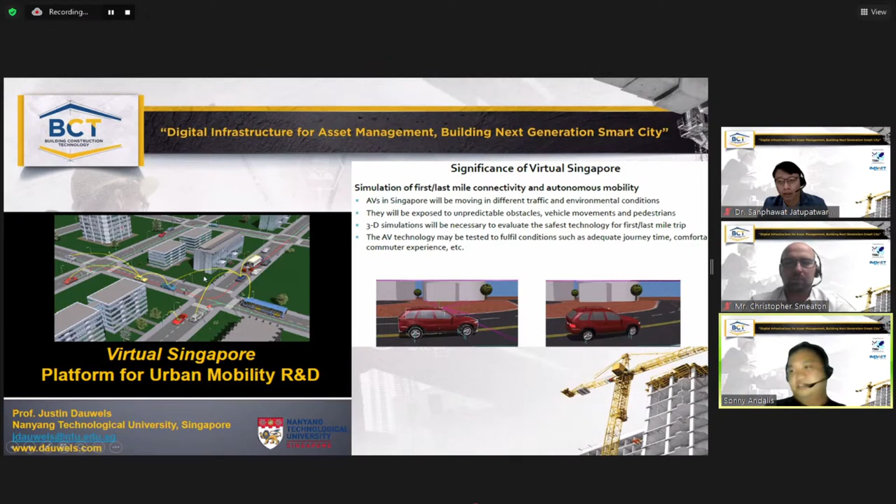Using Virtual Singapore datasets to create a 3D map, those autonomous vehicles can follow that, whether it's your private car, your bus, or your taxi. The focus at the time was actually buses. NTU has CETRAN, the Center for Research for Autonomous Vehicles, and they're using the Virtual Singapore datasets specifically for that. Okay, so that's so far.

I hope you picked up something. For questions, let's go back to you, Dr. San. Yeah, okay, thank you. That's wow, it's streaming, I'm looking for popcorn, that's a lot.

Great story though. I have a few technical questions - how do different agencies communicate this, given this is a huge amount of data across different platforms with different needs and uses? A mixed question: who is hosting this, and who is at the head of the table to make decisions? I'll go this way, from your participation.

At the time there was a task force specifically handling Virtual Singapore, and every agency had a representative. I was the representative for BCA, Building and Construction Authority, and we met every other week to decide things like what file format to use, who's going to host it, how do we access it, and the use cases by the agencies. Different agencies asked for different things, so we needed to harmonize them. There was a national task force from different agencies meeting regularly to discuss concerns and inputs. For example, the Land Transport Authority could contribute models for rail, road, and underground pedestrian networks, parks could contribute the digital terrain model of the parks, and PUB could contribute the underground models for sewers and water pipes. So there was a task force meeting regularly to discuss those.